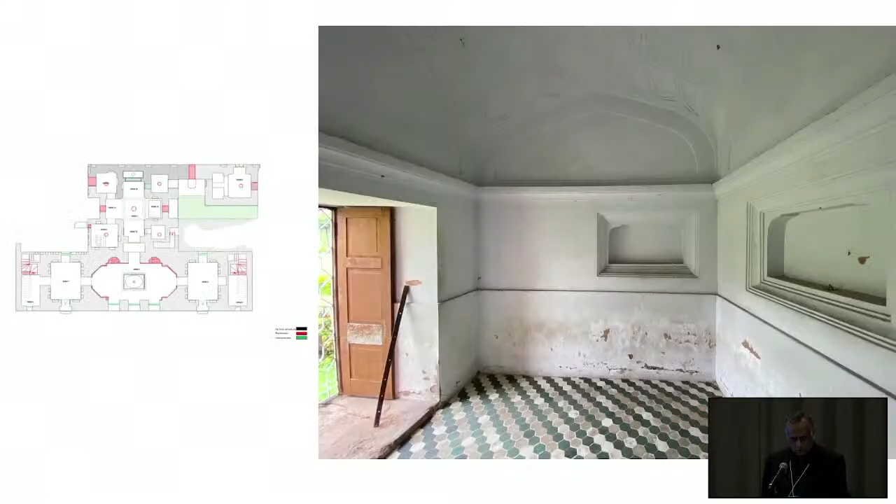they introduced a lot of openings, side openings. From the side, we can see there is a huge opening - this is a new intervention, and they closed up the original well. So my job should be to close all these openings and again open up the light from the roofs.

And we have sealed the previous opening from the left side and opened up the light well from the top. This is a central room, and the light comes from the left side, we can see, and there is a chandelier, a recent chandelier, and at the top there is a...

At the top there is an original light well, so we have to remove it - the same quality of light, but different ambience. Now we can say this is a hammam. It means we have unfolded the original function, original space, original light quality.

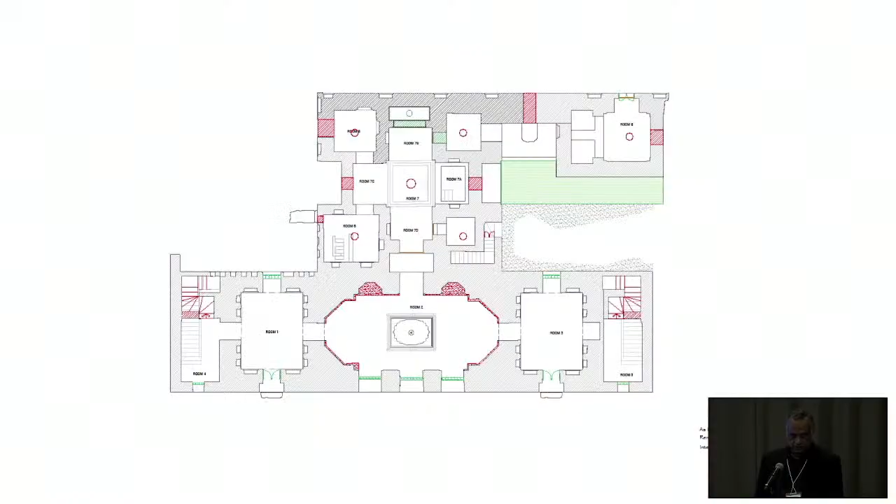There is a stair inside the building. In this plan, we can see in the corner there was originally a stair, but instead of using that stair, during the reconstruction in the Pakistani period, 1958, they introduced a new stair - this is the new concrete stair. So we have to remove it.

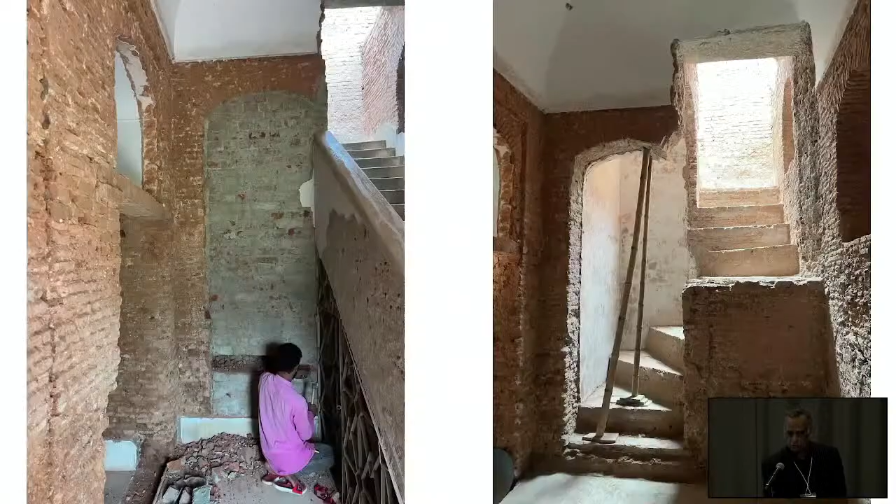After de-plastering, we can see this wall opening was sealed with cement and bricks. Then naturally we have to remove it and find the original stairs. These are the original stairs - we have to restore all those original stairs.

This is the process - we have to show the construction system of the stair. Even the steps we have to cover with wood to prevent deterioration of the bricks from wear and tearing. And there's another example of how we will document all the phases of construction.

This is another example, for another building. It was in ruin. In 1975, it was restored by our archaeology department in such a way. And this picture was taken in 2012 when I started the reconstruction, the restoration, of this building.

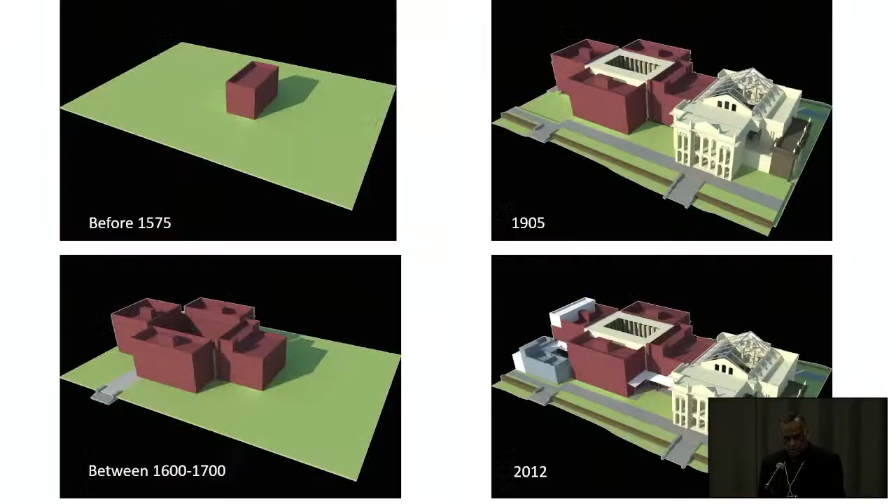Our first job is to conduct thorough research of the incremental growth of that building. Each and every building, or even human being, has some growth, addition, alteration. Then we have to identify all the new elements and the phases. There are 4 phases we have identified, and this is the most interesting thing.

The first one is very old, before 1575. The second one was built during the Mughal period, 1600 to 1700. Then, after the Mughal capital shifted from Dhaka to Murshidabad, this place was left abandoned for around 200 years, and nobody used it.

At the beginning of the 20th century, in 1905, one Hindu Jamindar bought this complex and cleverly built his own residence using all the buildings. The white one is his new residential building, and he introduced a corridor connecting all 4 old buildings, and added a new gatehouse in front of it.

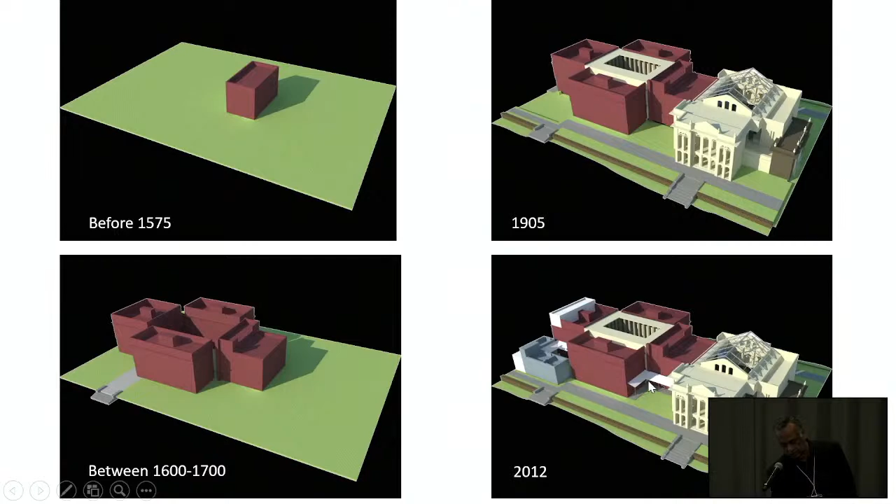The last phase, due to use as a museum, required introducing a lot of new rooms, like storerooms on the top, the white ones, which are all later additions. So our job was to remove just the recent additions and preserve the pre-Mughal and colonial elements, the phases we want to show the public, architects, and students.

After restoration, from these images we can see different types of material, different types of arches, different openings. The first one is one material, the second is red, then white and red, then red again. Red is not really a color, it's the expression of brick and powder dust, powder brick and lime. Our job is to show the public and showcase all the phases.

This is the earliest phase, where there is no reinforcement, only brick arches, flat brick arches. Louis Kahn was influenced by this kind of flat arch. We expose all the bricks for our students and the next generation to show how the construction system was, always focusing on showcasing the construction systems. In the second phase, in some cases we have plastered it and also exposed bricks.

This part is the Mughal part, and this is colonial, everybody knows, with capital on everything, base and capital, some order, columns - this is colonial. This corridor is colonial. We can see all the stained glasses, colorful stained glass, late colonial and Victorian.

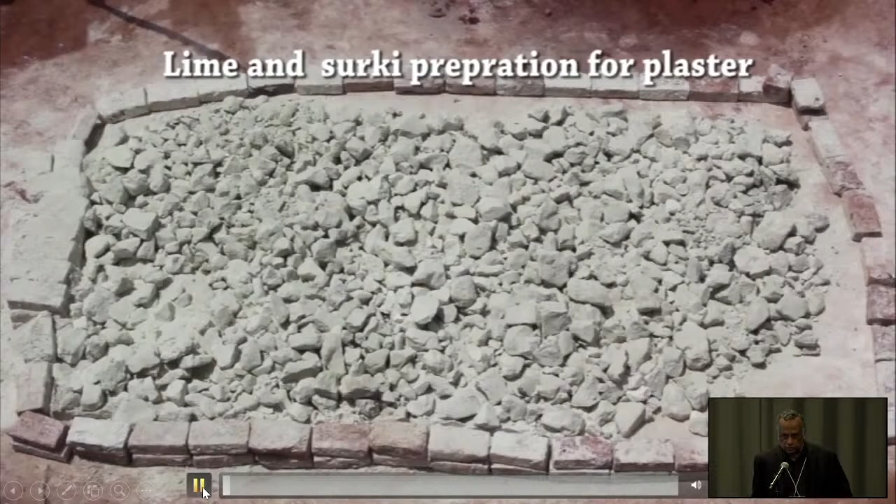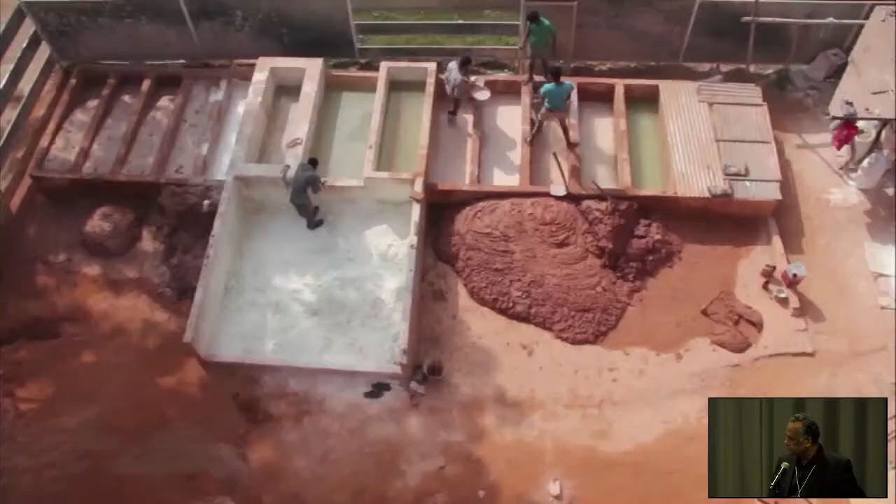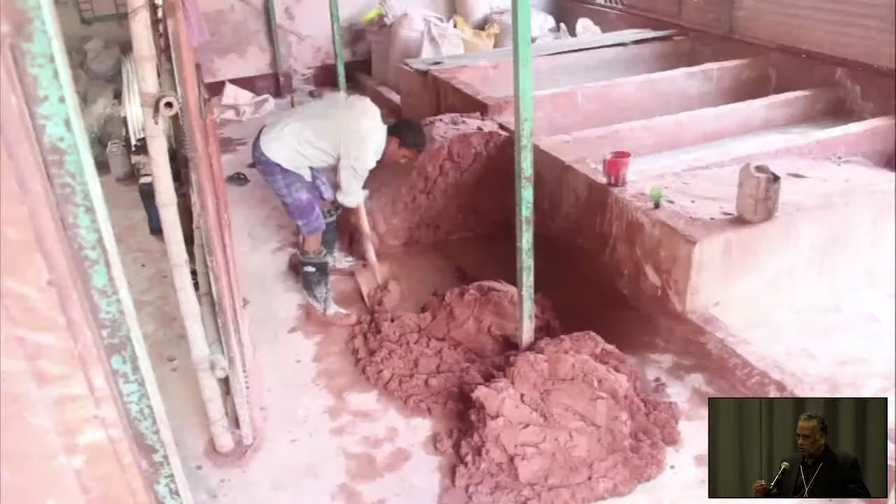From this video, you can see the process of lime masonry. Due to the scarcity of shell lime, now we are using slaked lime. And as a bonding material, we have to use traditional bel juice or molasses for better bonding.

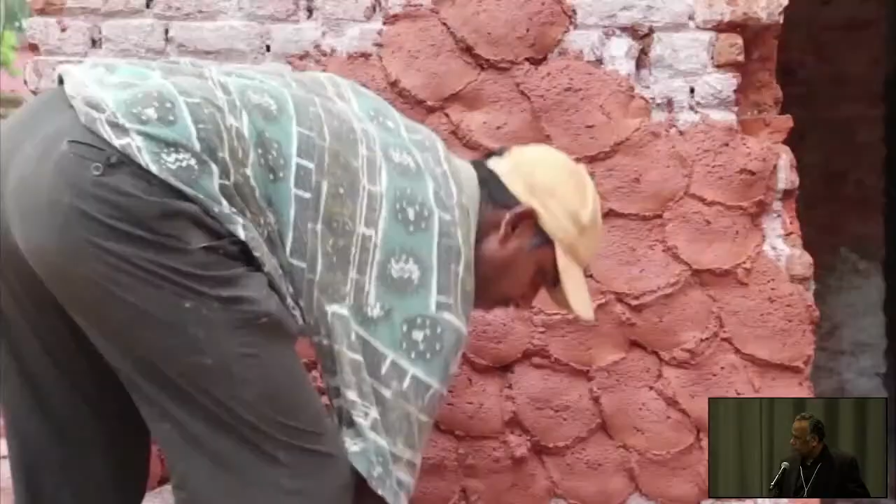And this is the finishing material. We have to use very fine lime and fine bricks, and again we have to use some traditional bonding material. We can see the finished surface.

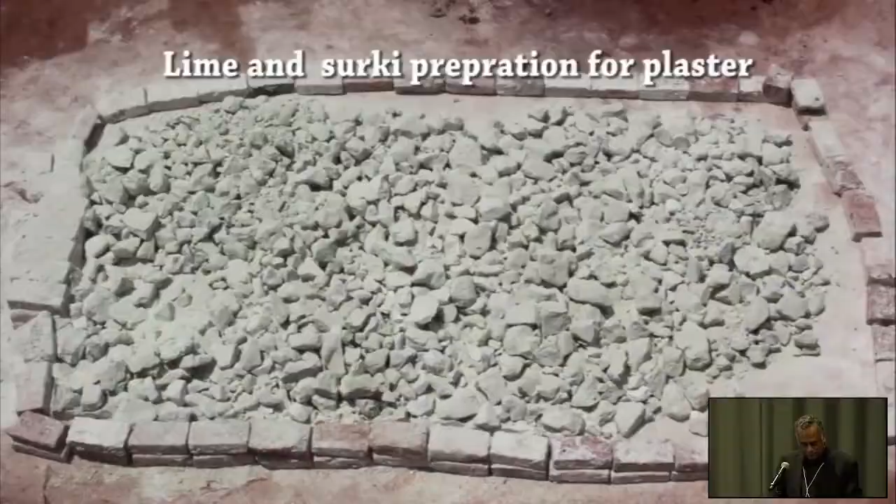And the fourth one is a typical roof construction system. In Bengali, we can say Kori Borga, made with wooden purlin and wooden beam. This is another example that can be a model for Bangladesh, because the whole country is dotted with small residential buildings.

Each and every village has such kind of residential building, but all are in ruins. We can see how the condition of that building was. Even the trees are spoiling the whole masonry wall, and even the roofs had collapsed.

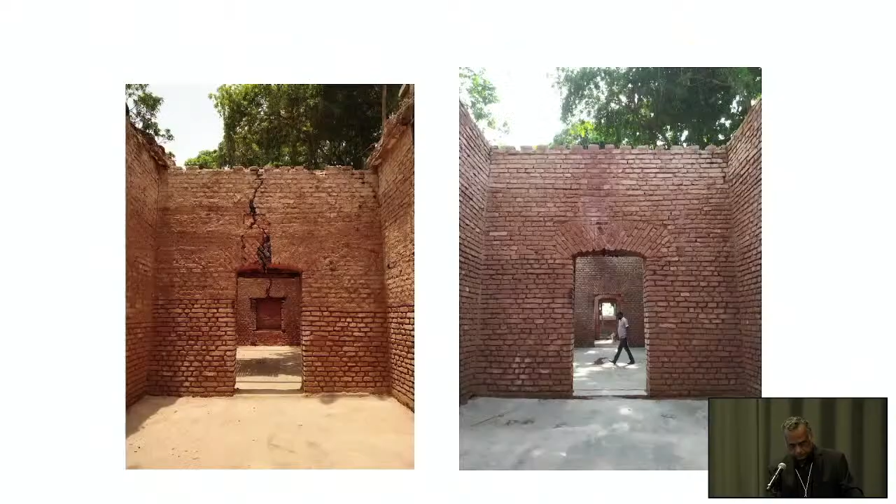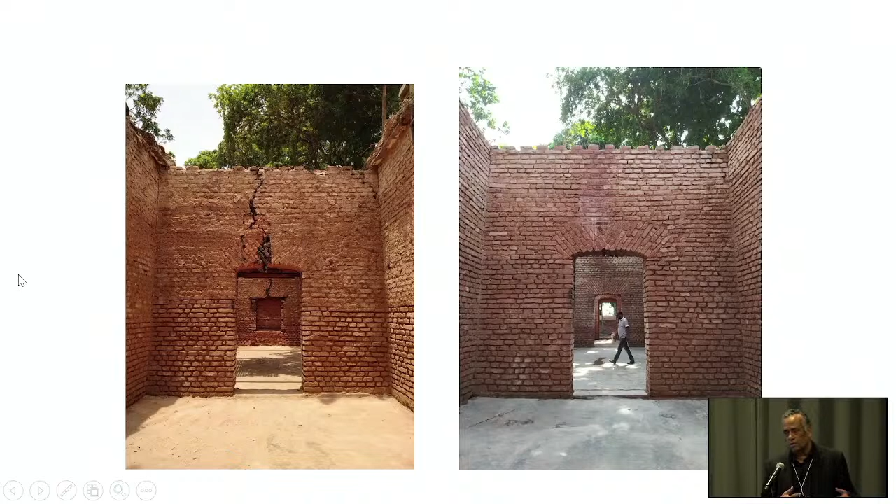Then we started only with cleaning. After cleaning all the facades, we have to repair the bonding and the cracks. On the left side we can see the cracks. On the right side, it's called brick stitching - no new material, just stitching of the bricks with bricks and lime mortar.

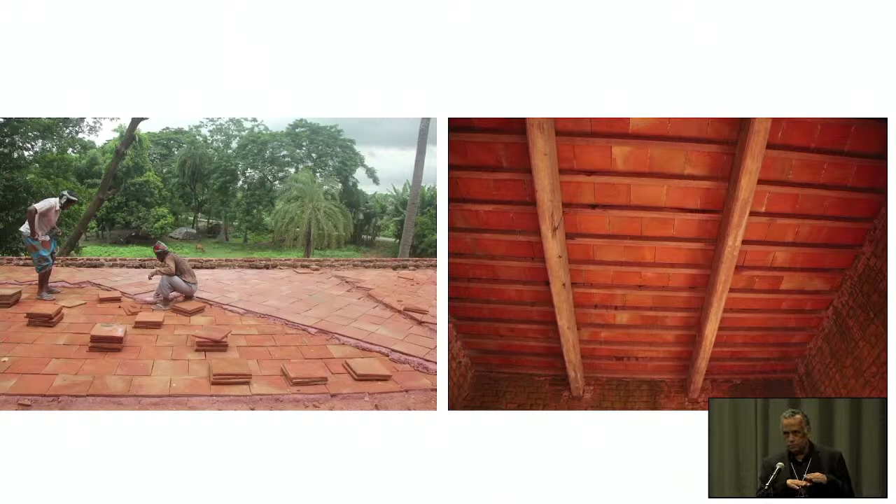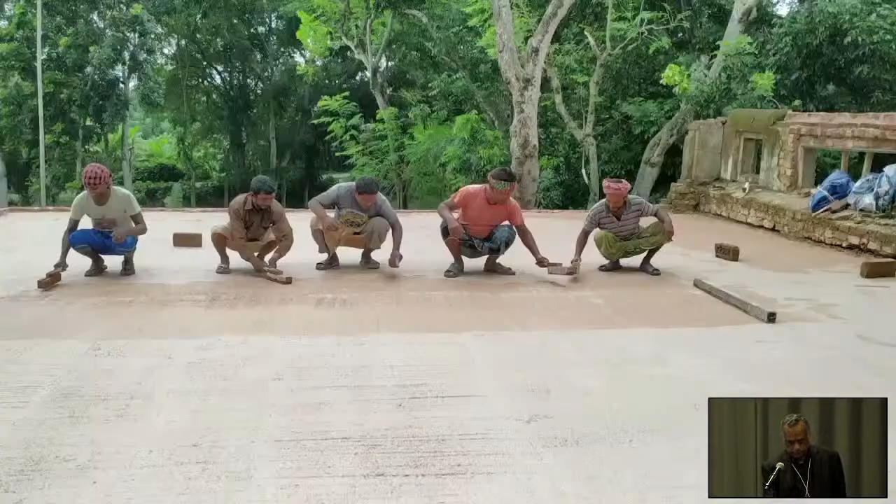Then we have to place again the wooden beam and purlin, and upon the purlin we place small brick tiles in two layers. Here we can see the section of the roof construction: at the bottom is the I-beam, then the tiles, and lime masonry on top. The lime masonry has to be beaten for gaining structural strength.

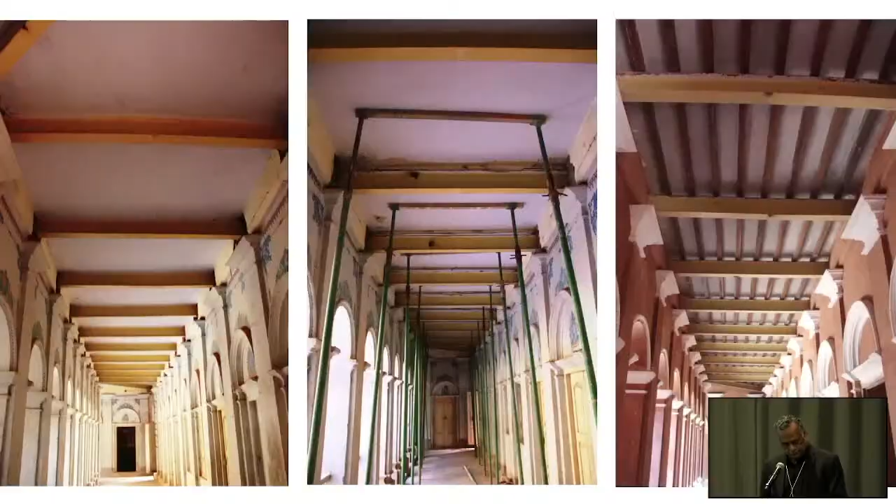Another example: most engineers, when they see the roof has collapsed, their suggestion is always to remove everything and construct with a new construction system - RCC. This is one example, the same building I showed at the beginning, showing the phases of construction. Our government archaeology department restored the roof with RCC construction, but luckily they retained the I-beams. In the first view, this roof is RCC, but they kept the I-beam.

Our goal is to show the construction system, so we lowered down the I-beam and inserted the purlin again so that it looks like the original construction system, although the roof is made of RCC. People can probably understand this was the construction system. We are focusing on the construction. The left was before and the right was after restoration.

And the last one, in Dhaka city, a special type of ornamentation was developed. In Persia or Iran, they have ceramic tiles, blue color glaze tiles. In Bengal we didn't have that kind of tiles, so people wanted to make a new surface ornamentation. They collected porcelain or houseware, plates or bowls from either Holland or China, broke them down, and clad them on the surface to make a mosaic or ornamented pattern.

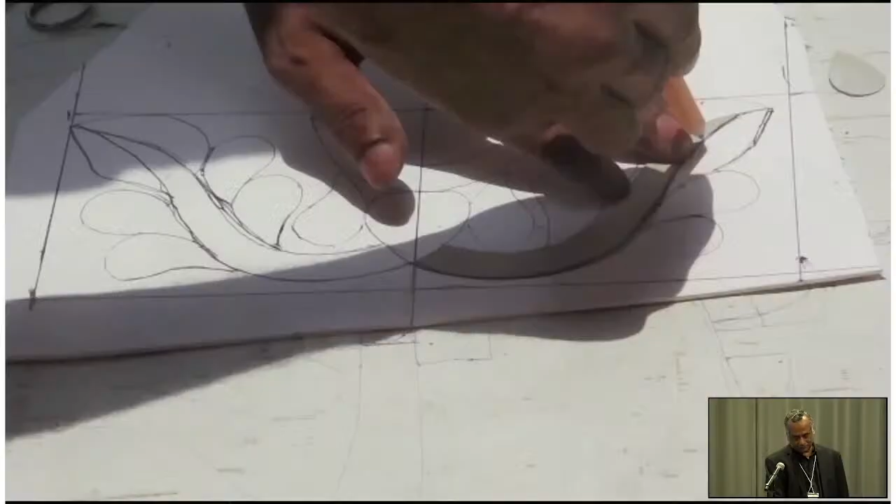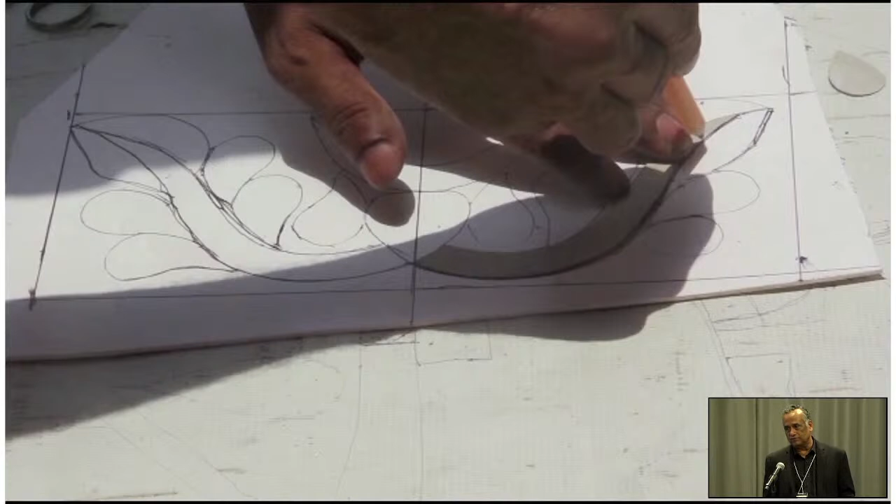And this is my last slide, because we have to honor our craftsmen. We have to revive this craft - only 3-4 families in the whole city know how to make this pattern. So we have to revive that craftsmanship, and we have to look into their livelihood even, otherwise this group will spoil. In Dhaka, we have only 3-4 families who can do this. So for that reason, my last slide is dedicated to them.

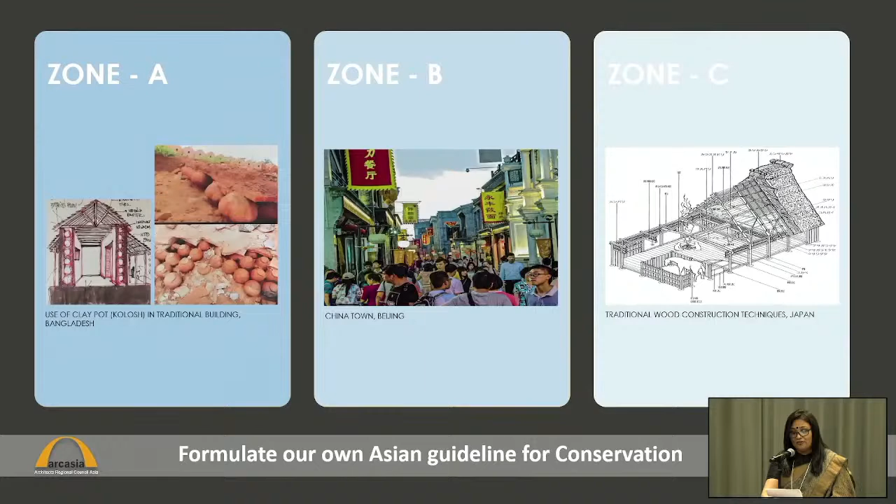There were so many action plans and proposals, like adaptive reuse of urban architectural heritage, formulating our own Asian guidelines for conservation, documentation of indigenous heritage, identifying transboundary nominations for World Heritage listing, promoting heritage tourism in Arcasia countries, knowledge sharing of modern architecture heritage, and so on.

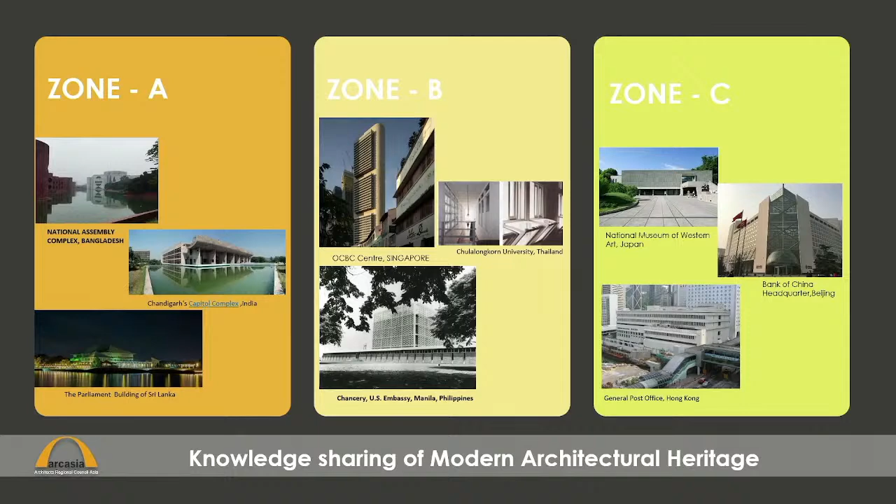In these slides, a few examples from Zone A, B, and C of Arcasia are shown for convenience. In our first round of discussion, there were also action plans for intangible heritage, like documenting and promoting traditional festivals of all 22 member institutes, traditional musical instruments, traditional crafts, performing arts, oral traditions, social practices and rituals, and even traditional food preparation, and so on.

After the third round of discussions among the AHPG specialists, we decided to arrange knowledge sharing webinars by all 22 member institutes on 3 topics under tangible heritage.

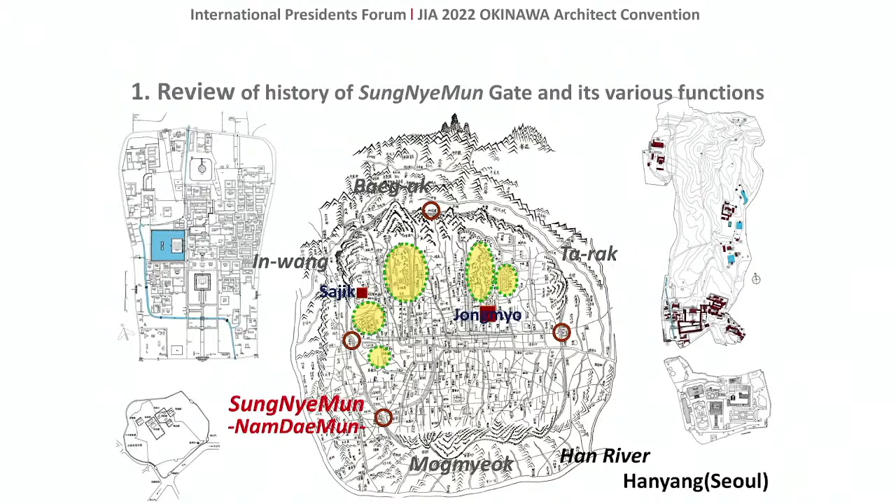First completed in 1398, SungNyeMun was used as the southern entrance to the royal capital of Seoul throughout the Joseon dynasty. It was built with an arch entrance in the center of a stone masonry base, and above that was built a wooden pavilion. Prior to the 2008 fire, it was the oldest wooden structure in the city of Seoul.

The name of the gate came from the word 'ye' in Chinese 'li,' meaning etiquette, one of the 5 virtues of Neo-Confucianism, which is the political, academic, and ethical basis of the Joseon dynasty. Ye corresponds to the south, and according to the 5 elements that form the basis of Korean philosophy, it also corresponds to fire.

The Joseon dynasty promoted a healthy society through good manners, or ye, in accordance with Neo-Confucianism. The signboard of the gate is written vertically, unlike the signboards of other gates. According to Pungsu theory, Mountain Gwanaksan physically resembles fire, and if written vertically, SungNyeMun could protect the gate and the royal capital from the mountain's fire energy by fighting fire with fire.

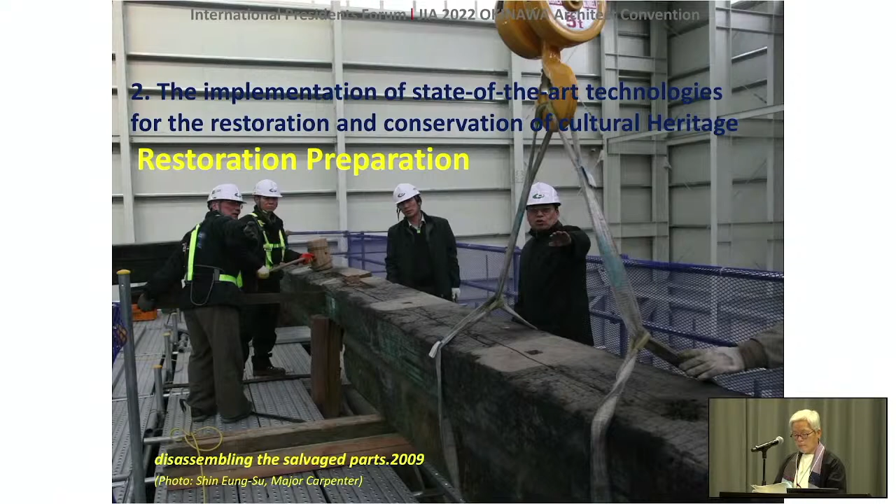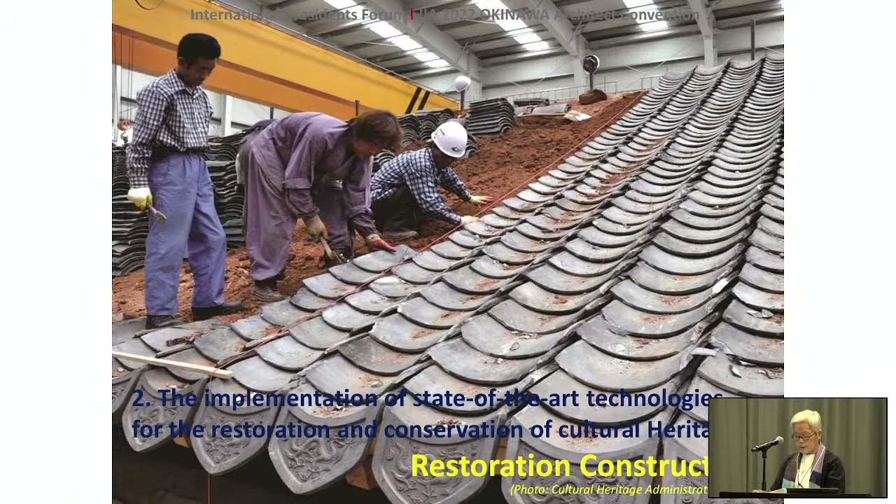Masons laid the granite mined from the mountains using traditional tools to repair the gate's stone foundation and rebuild the flanking walls. Major carpenters used traditional tools to process the wood for restoring the wooden pavilion. Both the salvaged wood and new wood were used. Roof tiles crafted by traditional craftsmen and fired in a traditional kiln were put in place using traditional tools.

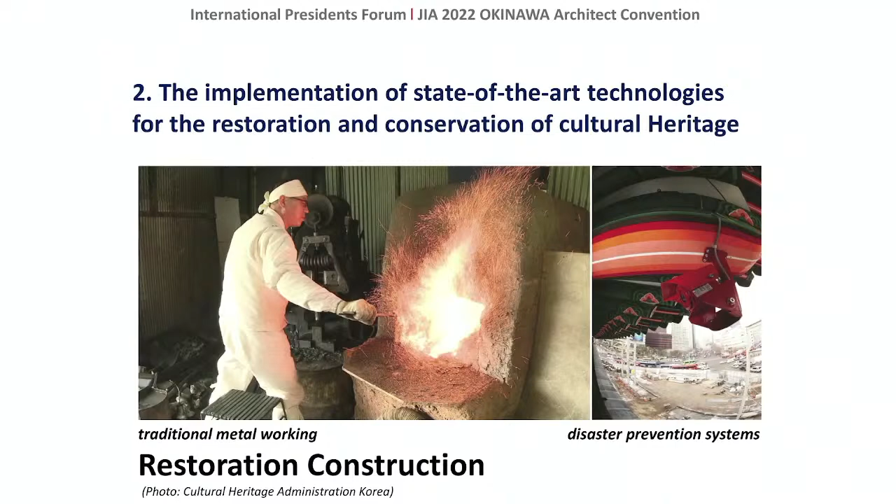Fire and disaster prevention systems were installed and the surrounding area was prepared.

Master Major Carpenter Mr. Shin, who was in charge of restoring the gate's wooden superstructure, said, 'I gave everything during the restoration of Sungnyemun Gate. It would be good if the public took this opportunity to pour interest and love into our cultural heritage with a sense of ownership.' Master Shin insisted on using as much of the salvaged wood as possible. For the remainder, he found locally produced pine over 100 years of age, fashioning it by hand using traditional methods.

He considers strong red pine the best material. For the main pillars of the superstructure, he used pine over 300 years old. Where it would not present any safety problems, he left a piece of wood scorched from the fire as a reminder. On the pillars on the upper floor, he used both salvaged and new wood.

Shin had also participated in the 1962 repair of the gate. Having learned under some of the greatest masters of the age, he was able to teach the new generation of major carpenters.

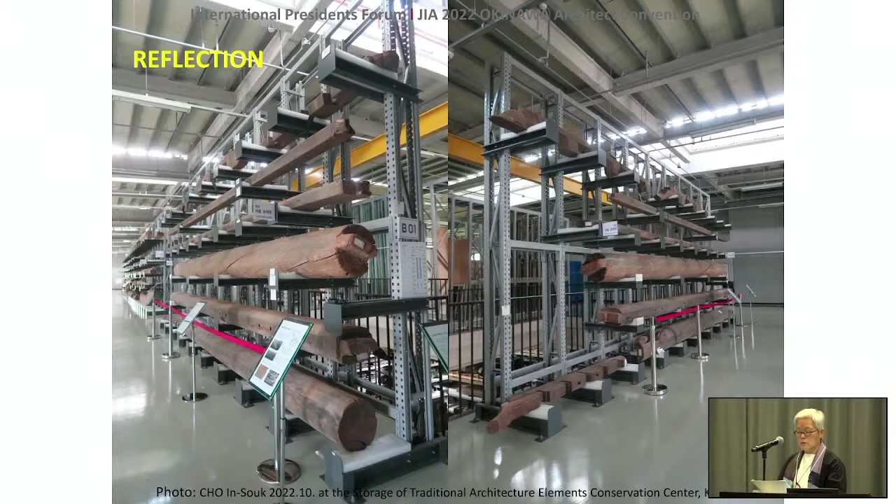Sungnyemun Gate restoration work will be a touchstone in terms of disaster preparedness, the challenge of the materials and techniques applied, and many other aspects of the recovery of architectural heritage—not only because of the unprecedented amount of time and money spent, but also because the expertise performed was unparalleled in the entire history of architectural heritage restoration in Korea.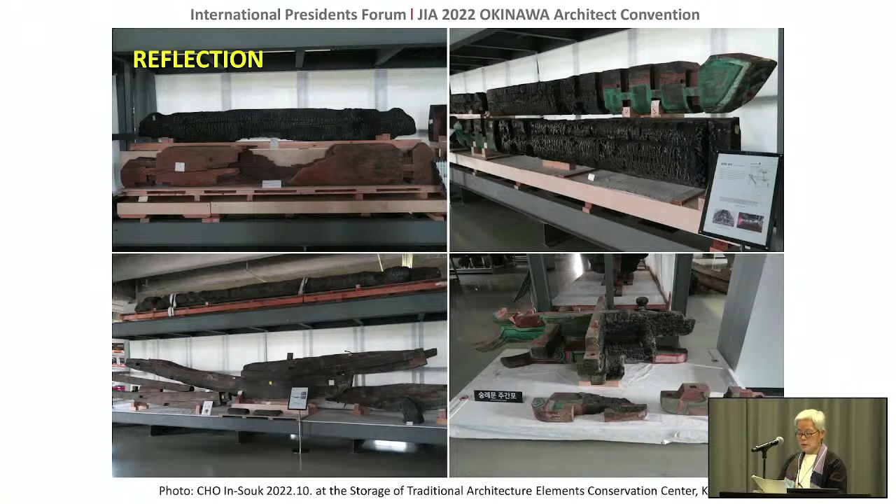However, what's lacking throughout the whole process of restoration was consideration of a bigger picture that includes the overall environment of the capital city, which could be a great resource for sustainable cultural landscape. Even within the criteria of time, it had taken a modern approach in some parts, early Joseon in other parts, and late Joseon in another. It would have been better to keep to the same era of any kind, either early or late Joseon, to maintain the continuity of the cultural landscape.

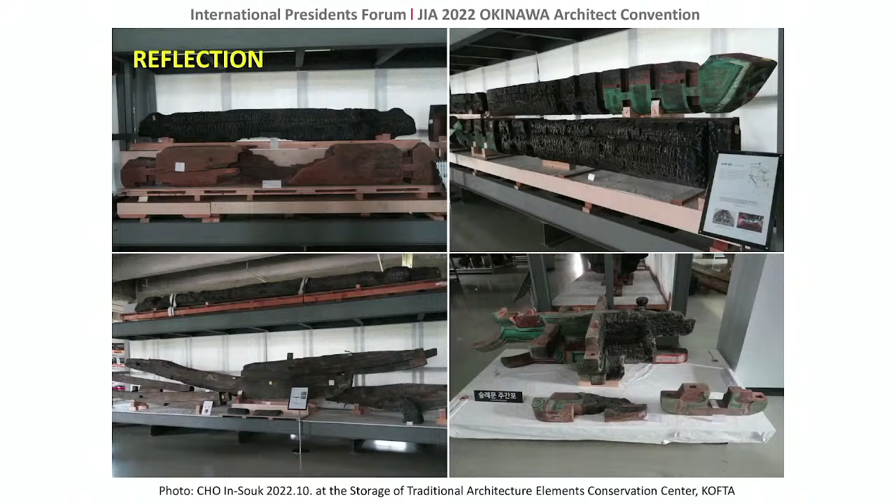Nevertheless, we all would appreciate all the efforts and people who are involved in the whole process of restoration work of Sungnyemun Gate.

That covers all I wanted to say today. There are, of course, more things I could talk about, but let's leave that there. Let me just run over the key points again. We looked at three main focus areas of this presentation: firstly, review of history of Sungnyemun Gate and its various functions; secondly, the implementation of state-of-the-art technologies for the restoration and conservation of cultural heritage, as well as new additions of its disaster prevention facilities; and lastly, reassess the symbolic meaning of restoration work as a tool for communication with the public. Before we come to the end, I'd like to thank you for your attention.

Thank you very much.

Thank you, Dr. Cho. I think your presentation was very inspiring, especially for people in Okinawa who lost their castle a couple of years ago. Thank you.